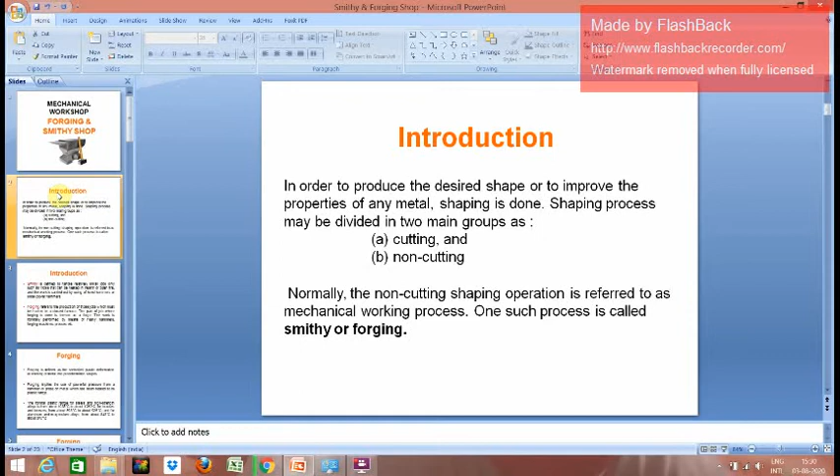In case of smithy or the forging process, you have to apply pressure with the help of the hammer or power hammers in order to bring it to a desired shape. Along with the pressure, you are supposed to apply the heating process in order to bring that workpiece into a plastic form. So we will be discussing this in detail in the further slides.

What is the smithy operation? Smithy is defined to handle relatively small jobs only, such as those that can be heated in a hearth or open fire. Once it is heated and brought to the plastic state, the work has to be carried out using hand hammers or small power hammers.

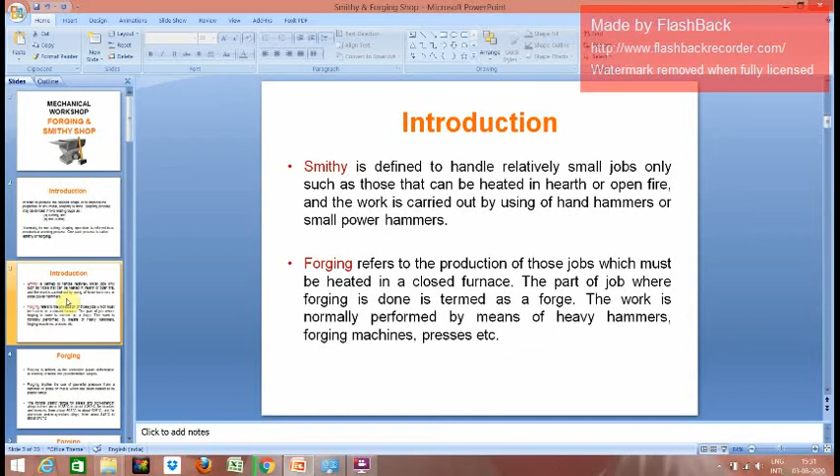Forging refers to the production of jobs which must be heated in a closed furnace. The part of the job where forging is to be done is termed as the forge, and here the forging has to be done by the use of forging press machines or heavy hammers.

Forging is defined as the controlled plastic deformation where the working metal has to be brought into a predetermined shape, by the use of powerful pressure from a hammer or press on the metal which has been heated to its plastic range.

Some data are being provided here: the plastic range for steels and high strength alloys is 1038 degrees Celsius.

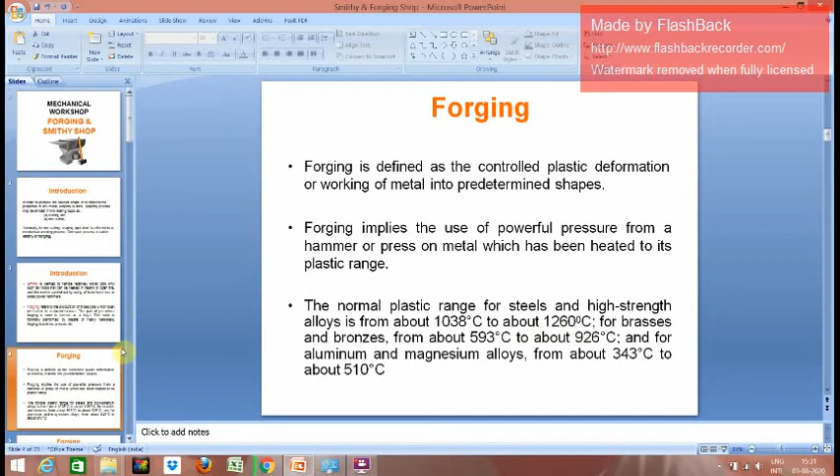During forging, the material should have sufficient flow properties and should work at the upper limit of the material's strength potential, so as to fill the die cavity shape without resulting in cracks.

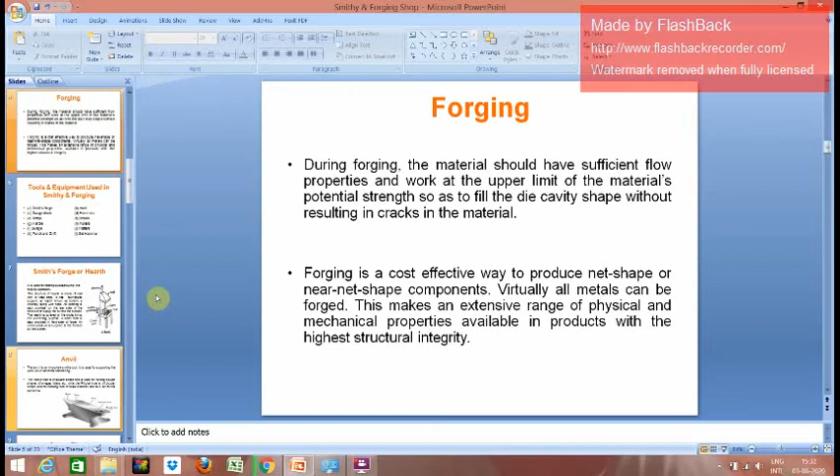Forging is a very cost effective way to produce net shape or near net shape components. In forging, many tools and equipments are used in the smithy and forging process, which I am showing here.

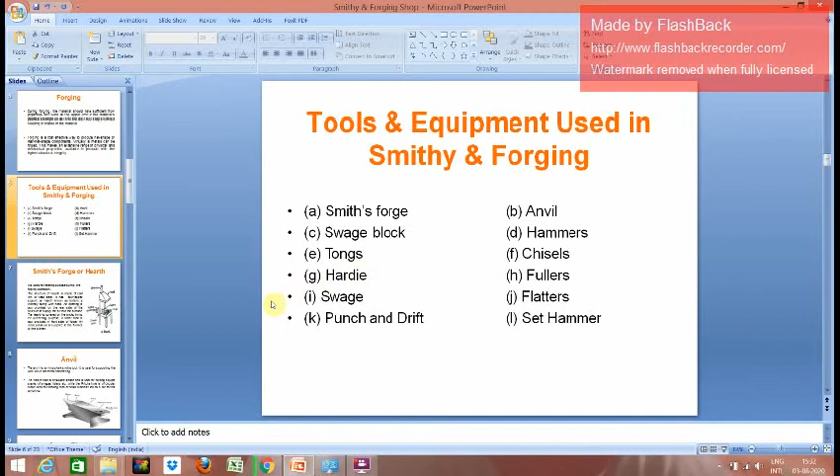There are 12 tools or equipments being used in the smithy and forging process. We will be discussing one by one these tools and equipments used in the smithy or forging shop.

First, the very important instrument, the smith forge or the hearth, where it is used for heating purposes during the forging operation. You can see the structure here: a variable speed motor is provided, along with the chimney with the hood, and the tuyers, coal, or CI water cistern.

The water cistern is provided for the quenching purpose. A water tank is also provided on the front side of the forge, and air under pressure is supplied to the furnace by the blower.

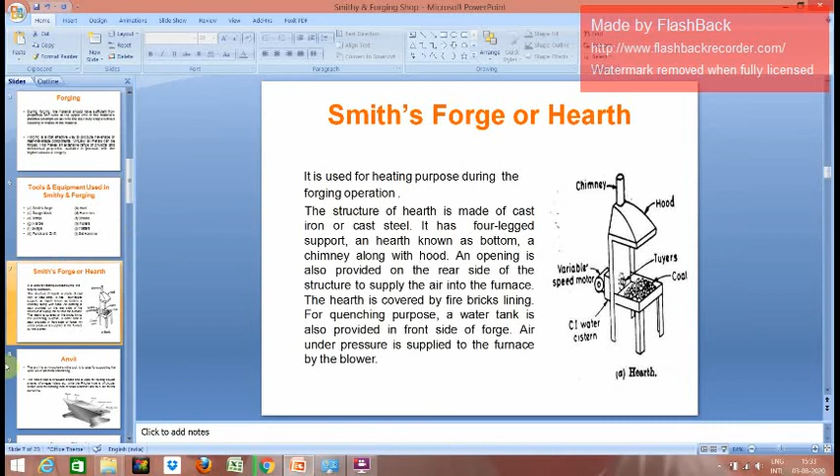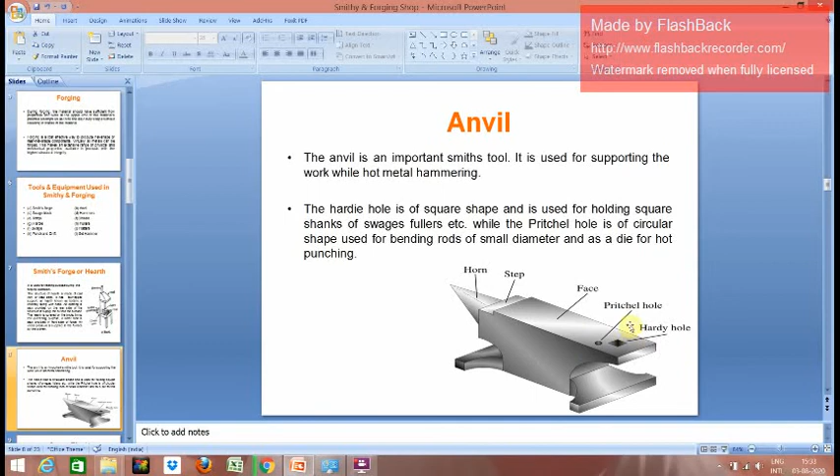Particularly, whenever the shape of the workpiece is square, the Hardy hole is used, and whenever the workpiece has a very small diameter-like shape, the Pritchel hole is used in the anvil.

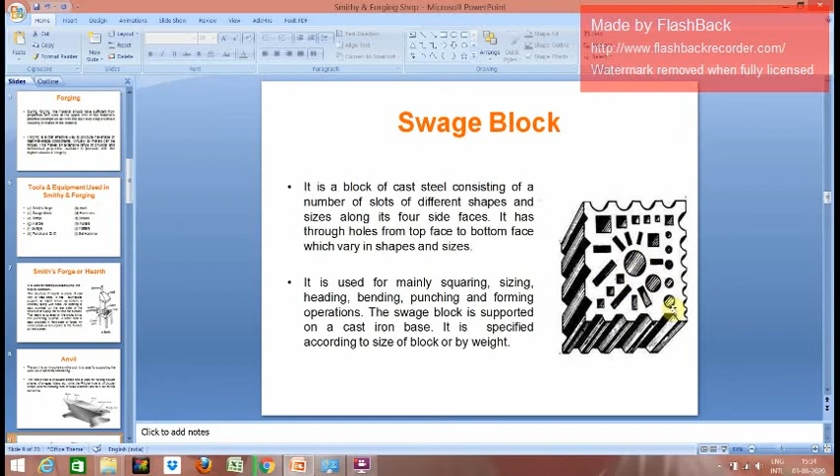Swage block: This is a block of cast steel upon which a number of slots are provided, such as circular, rectangular, and square shapes, drawn on the top face and bottom face of the swage block. It is mainly used for squaring, sizing, heading, bending, and punching operations.

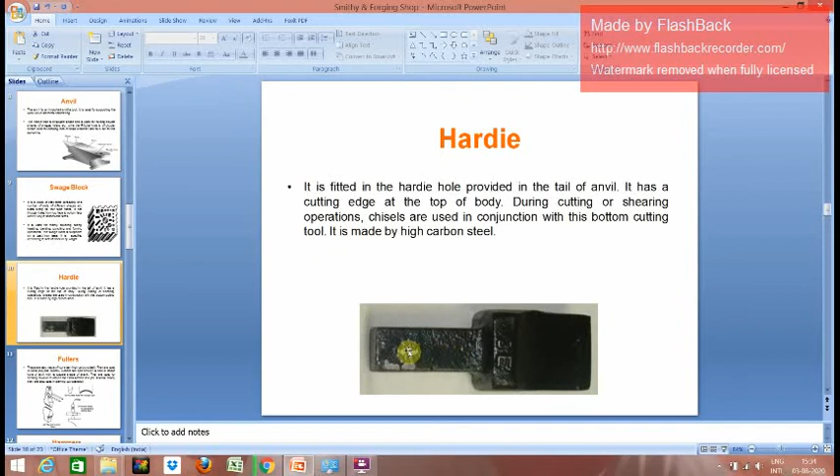Hardy: The hardy is fitted in the hardy hole which is provided in the anvil or the tail. It has a cutting edge on the top of the body. During cutting or shearing, these chisels are used in conjunction with this bottom cutting tool. It is made of high carbon steel.

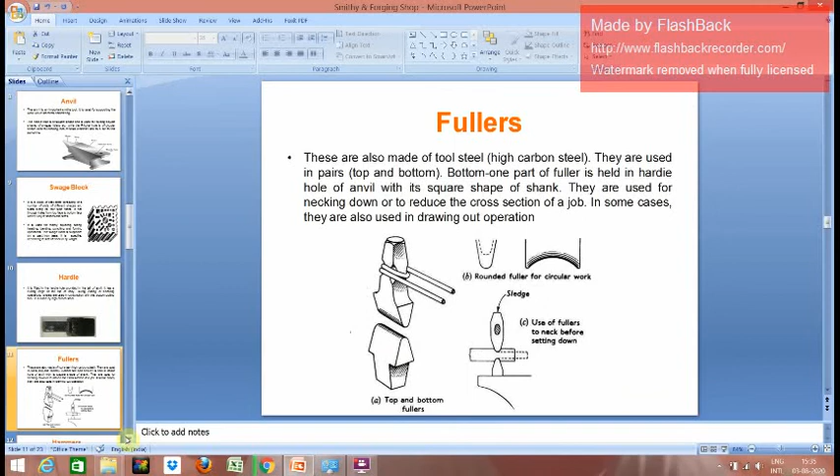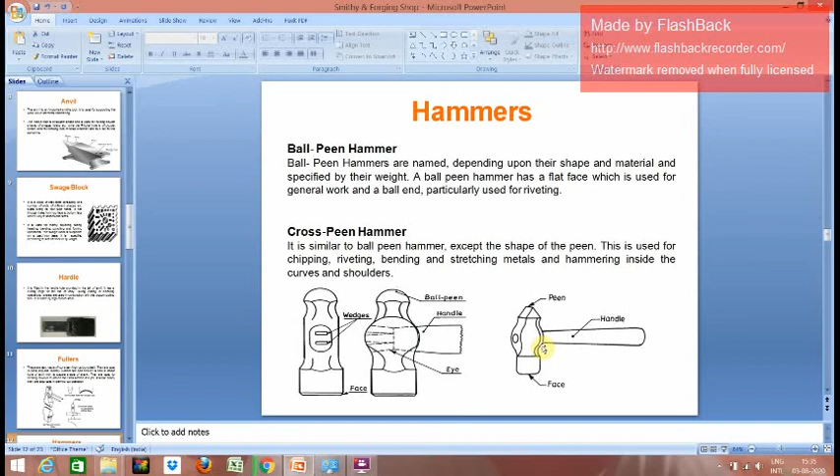This is a cross peen hammer. You can see it is exactly similar to the ball peen hammer, except the shape of the peen. This is used for chipping, riveting, bending and hammering the material, particularly inside the curves and shoulders.

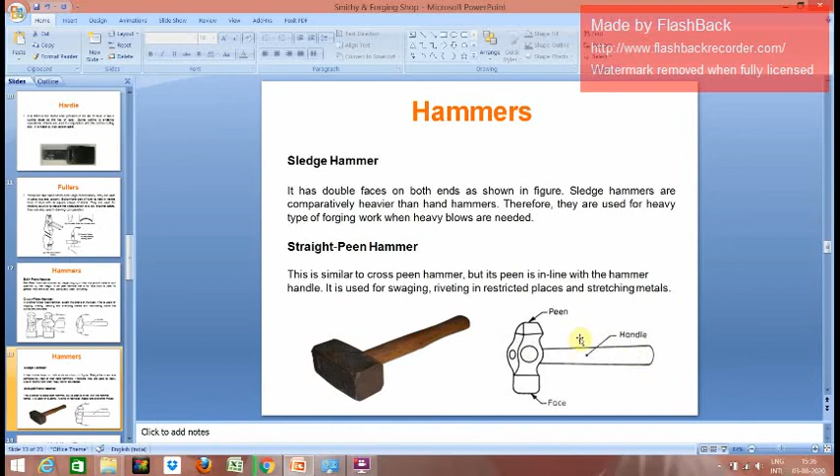Straight peen hammer. This is exactly similar to the cross peen hammer, but here the peen is aligned to the handle of the hammer. In case of a cross pin, the pin is not aligned to the handle. The pin is aligned to the pin of the handle. It is used for swaging, riveting in a restricted place, or stretching the materials.

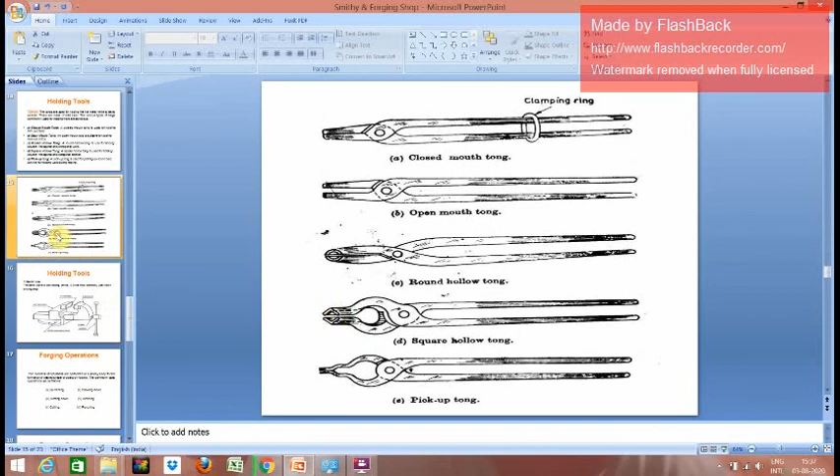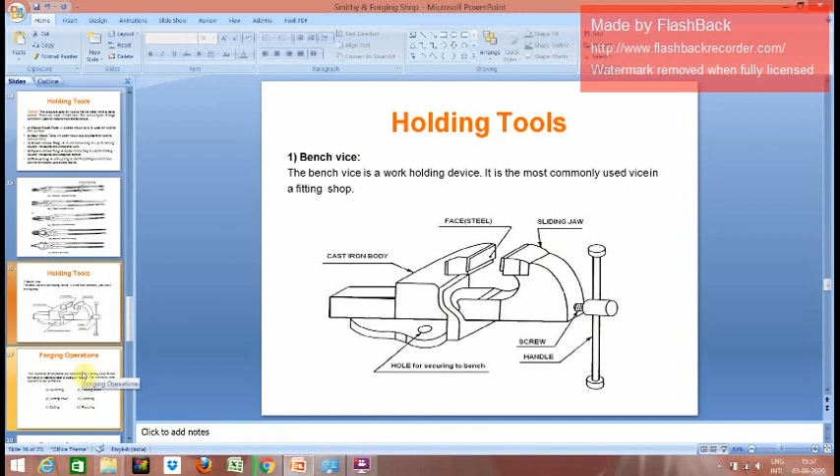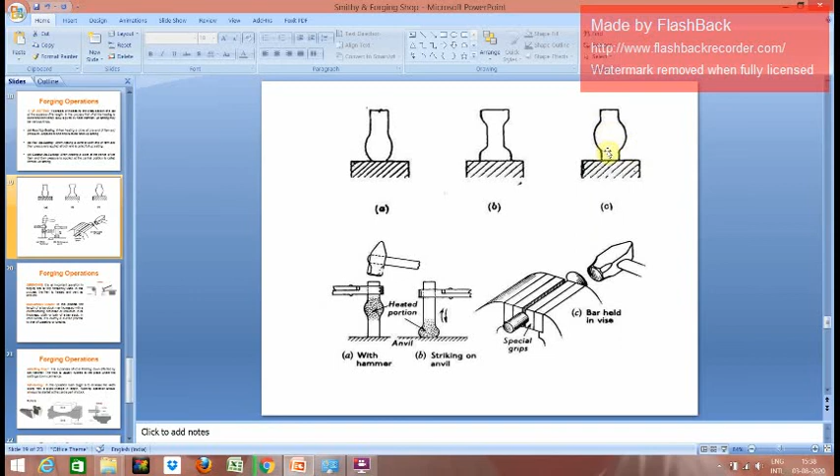What is full upsetting? When hitting is done at both ends, as you can see from the diagram, that is called full upsetting. What is central upsetting? You can see the center has been hammered, so this is called central upsetting. So these are the 3 processes: head up, full up and central upsetting for the upsetting operations.

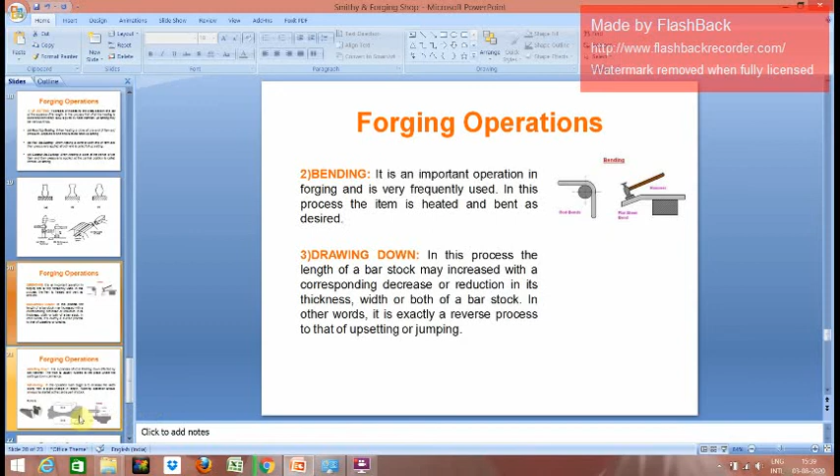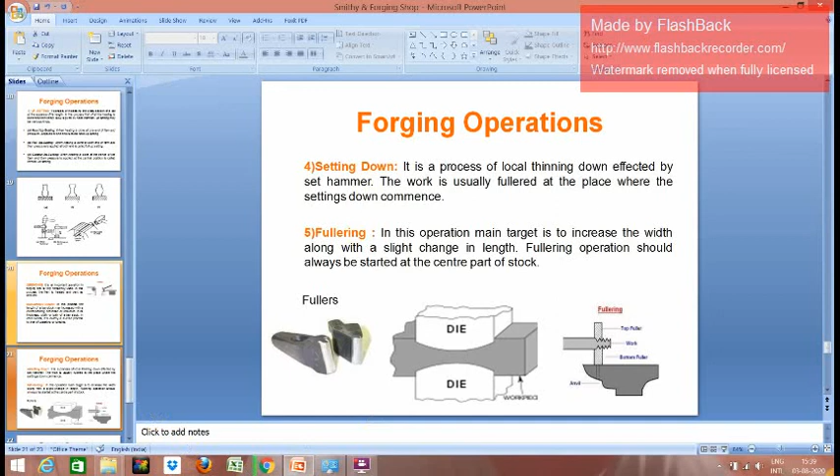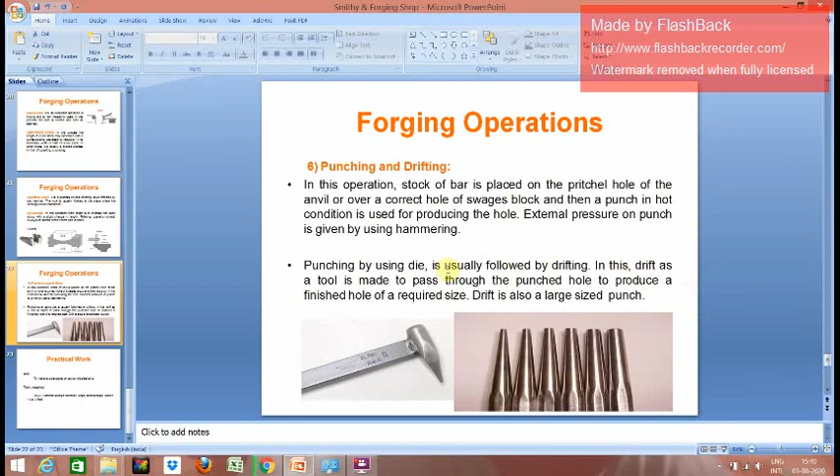With this, we are completing the forging operations and the different tools used in the forging shop or smithy shop. We will be proceeding for the practical work, and in order to make a pipe clamp, the aim of the experiment will be to make a pipe clamp using mild steel strip. So the tools required are given below.